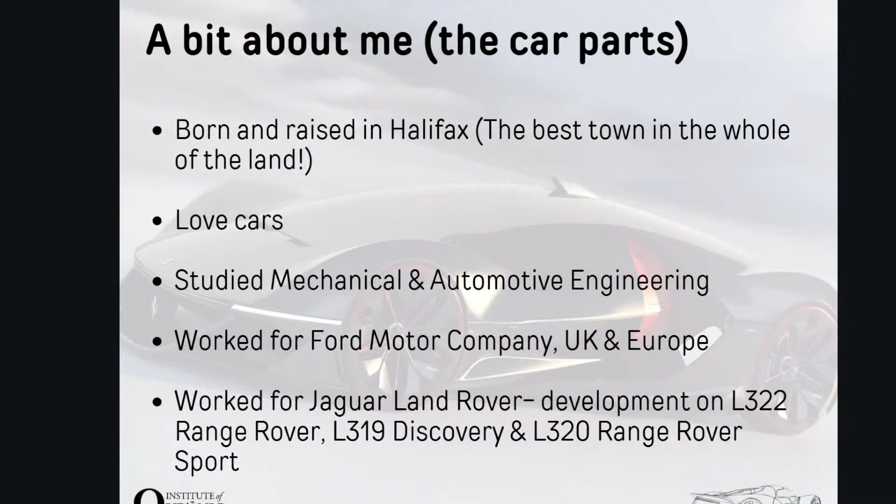So what is a car? Well, the English word car originated from the Latin word carrus, which means a wheeled vehicle. That's one of the first cars. So basically it's just 4 wheels being pulled along. What do you think that was pulled along by? Yeah, but obviously it's on wheels, but it's got no engine because it's before engines. What do you think it's pulled along by? Horse, yeah, well done, horse.

And that eventually goes to something like this. So these are obviously more modern supercars, hypercars of nowadays. Anyone name any of them? There you go, well done, good man. So how long do you think it took to get from the first one to these?

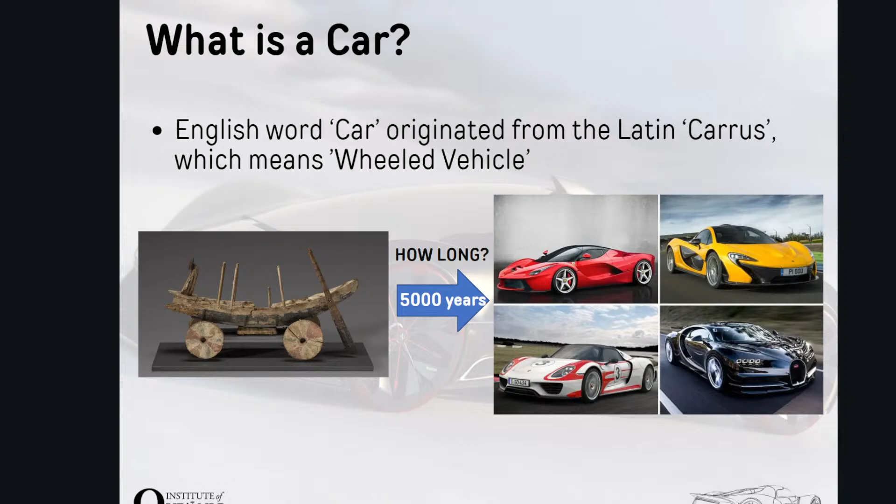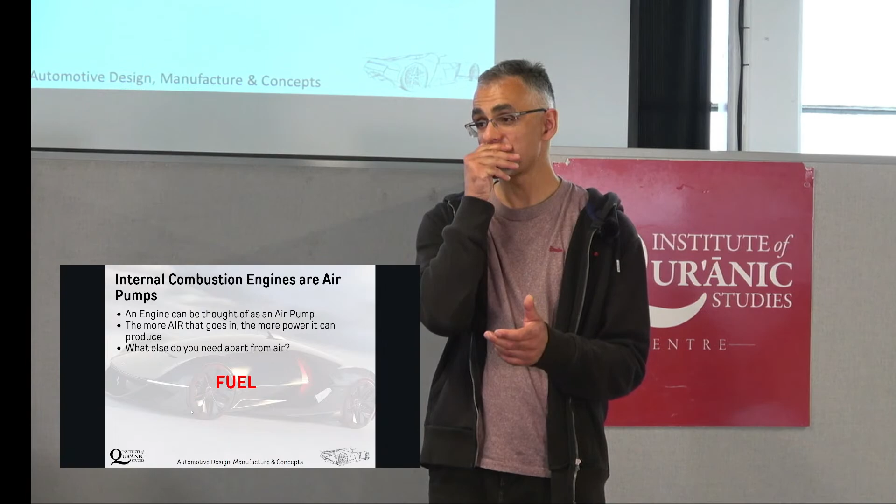So what else do you need apart from air in an engine? Fuel, yeah. What type of fuel? Diesel, petrol. What else? Well, that's sort of more for an electric motor car. Obviously, this is for an engine. So you could use biodiesel, bioethanol. In Brazil, they actually use fuel made out of sugarcane.

What's that, sorry? Batteries, yeah. Well, you need a battery, but the battery is just literally to get the engine going. A key, a spark. Right, so you need fuel.

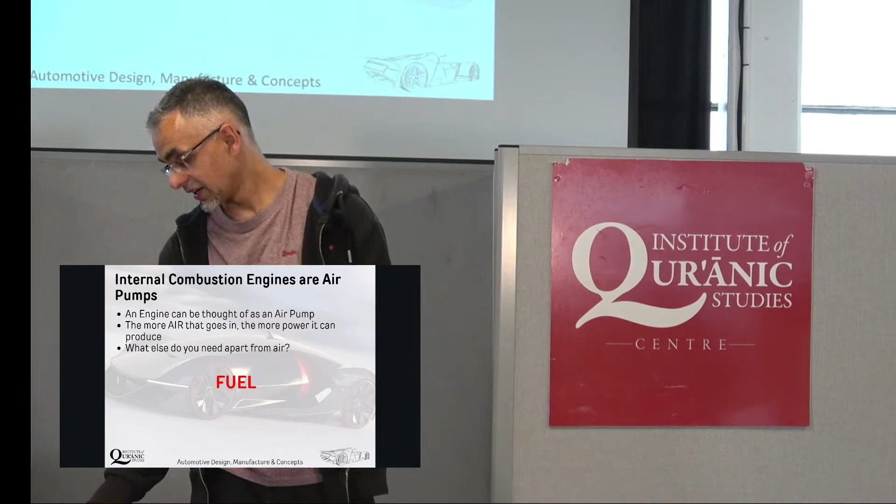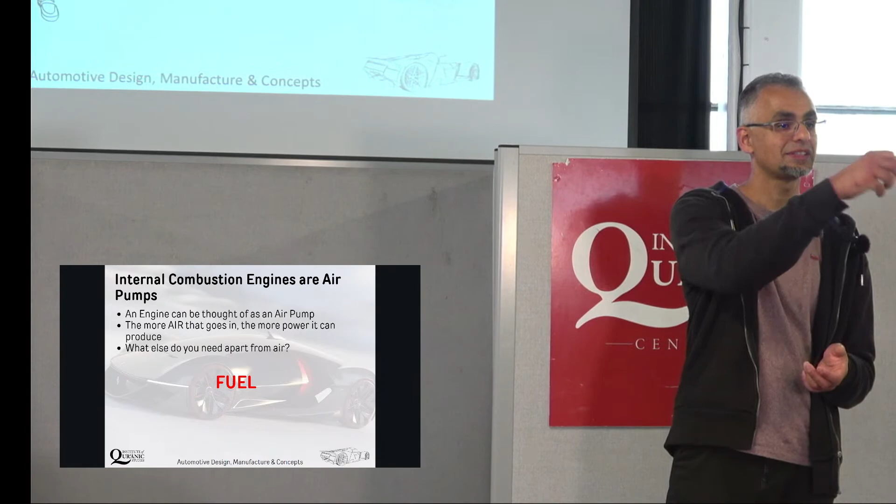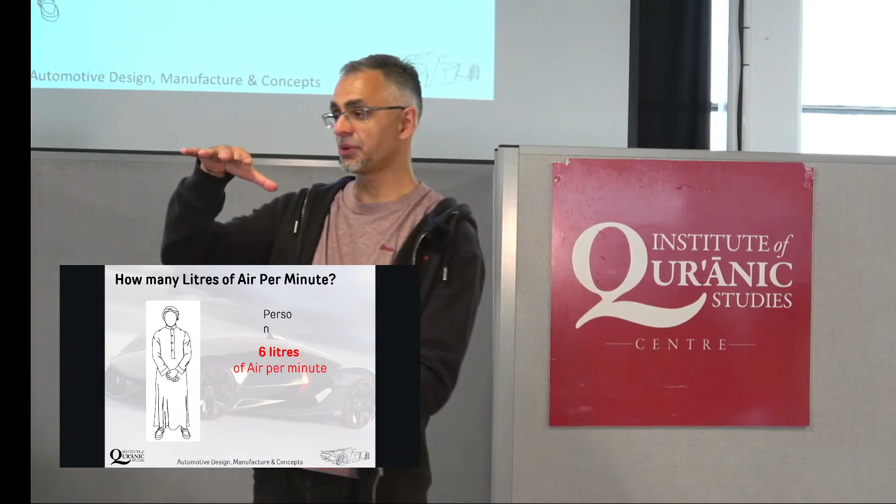Just to give you an idea, how many litres of air per minute, because obviously an engine's an air pump, don't forget, yeah? How many litres do you think a person needs a minute? 10 litres of air - so a person doing their normal thing, do you think would need about 10 litres of air a minute? 5? 120 litres - if you imagine the litre bottles of milk or whatever, you'd need 120 of them. I mean, that's quite a lot.

1,002? Yeah, otherwise you can come up here and do the course, and I'll come and listen to you. Okay, that's a bit of a more sensible answer. 6? 6, right?

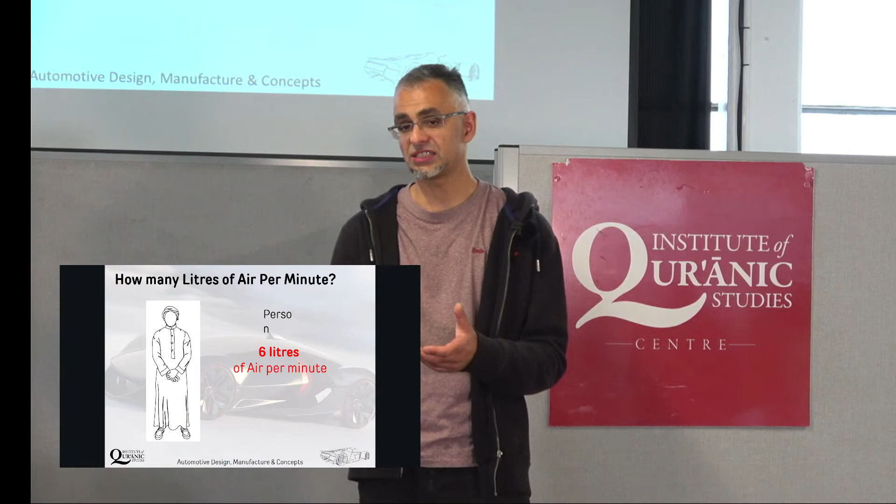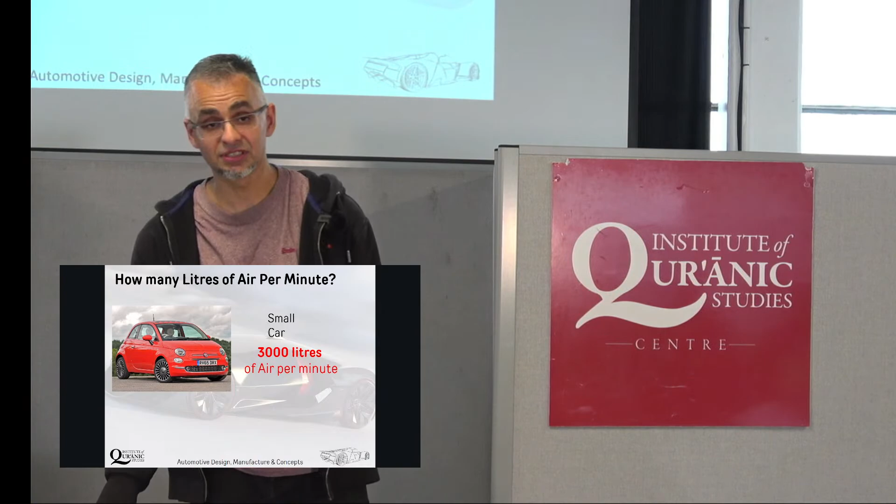A small car, how much air do you think that needs a minute? So bear in mind, a human needs 6. 500? 700? 300? 350? 260? 150? 2000? 3,000? So if you imagine a human being needing 6 litres of air a minute, going to a small engine needing 3,000 litres - now that's quite a lot.

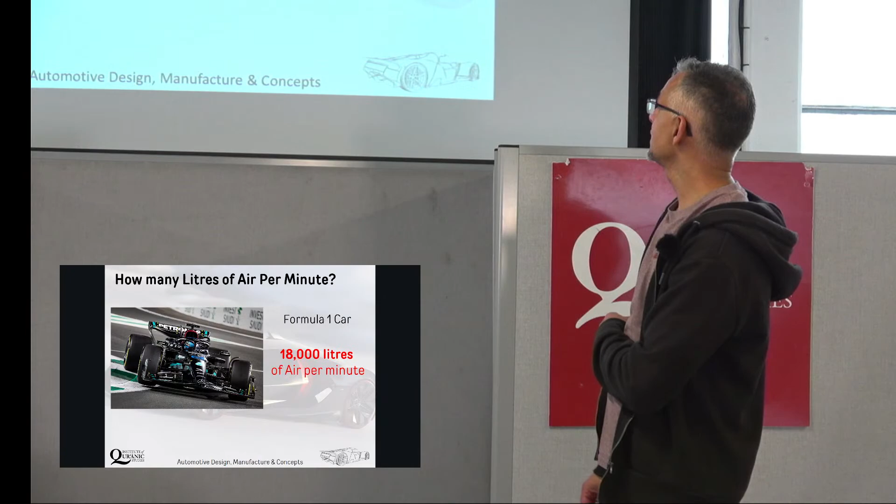Also, I told you that's 80. 18? 18, I think that's Lewis Hamilton in that car. So yeah, 18,000 litres of air a minute.

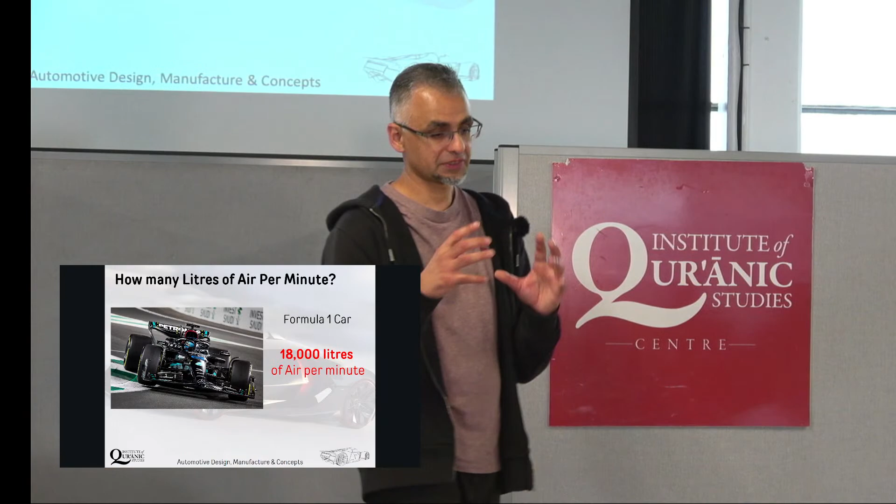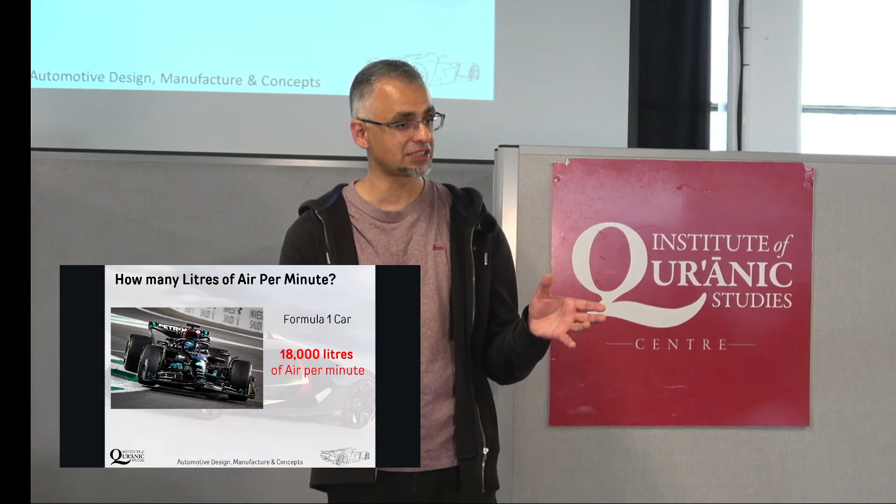And the other thing is, in any type of motor racing, they have to try and keep it as a fair playing field. So the way they actually limit the amount of air going into the engine - how do they limit the amount of air going into the engine? Because obviously if that's limited, you're going to limit the power. How do they limit it? Yeah, so the intake might be, I don't know, 35 mil or 40 mil or 50 mil, which is quite small really. So that's the only volume of air that can go through there.

So that's quite interesting really, if you imagine how much power these cars produce compared to a normal road car. Okay, so how can you get more power from an engine, do you reckon? We're talking about the air principle here. So what we want to do is try and get more air into the engine. How would you get more power? So there's 3 ways.

Yeah, a remap would do it, but I'm talking about trying to get more air into the engine. How would you get more air into an engine? If you imagine, here in Birmingham, whatever the air pressure is, normally 1 bar at sea level, that's the amount of air going in. Now what you want to do is force more air into the engine. If you can force more air into the engine, you can produce more power. Obviously, by doing that, you've got to put more fuel in as well. So how can you do that?

Increase the air tank, increase the fuel, and put nitro into it. Yeah, so you've got one of them. The nitrous is one way of getting more air in. Why is nitrous one way of getting more air in?

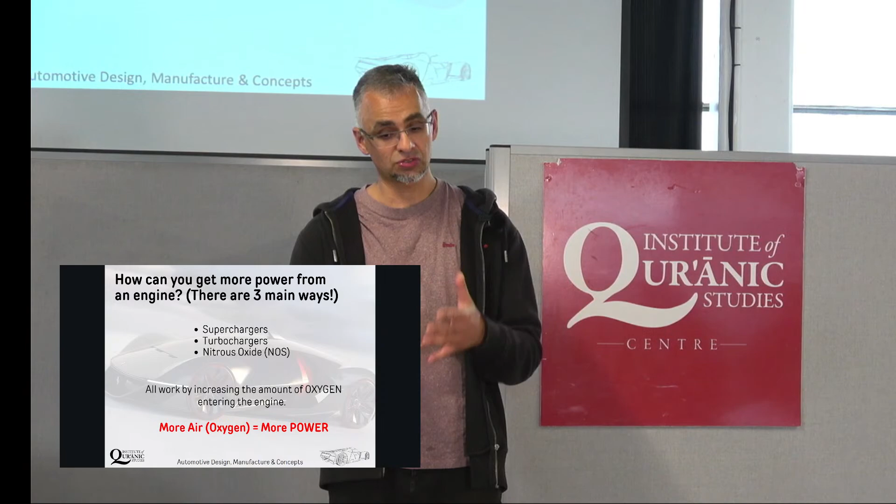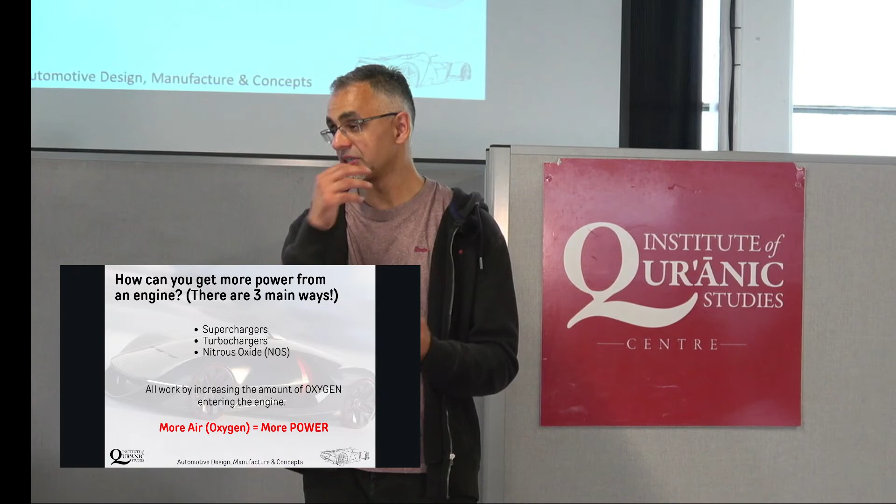That's why, if you're ever driving - one day you'll be driving your own cars - if you're in a really hilly, high altitude area, the engine's going to struggle to produce its maximum power because the amount of oxygen is lower. They say the air is thinner, but really the amount of oxygen is less. Modern cars' computers actually work that out and adjust the fueling, dropping down the power just to make sure you can carry on driving. In the old days you'd have trouble, you'd have to open the bonnet, set the carb and everything to carry on. So yeah, more oxygen equals more power.

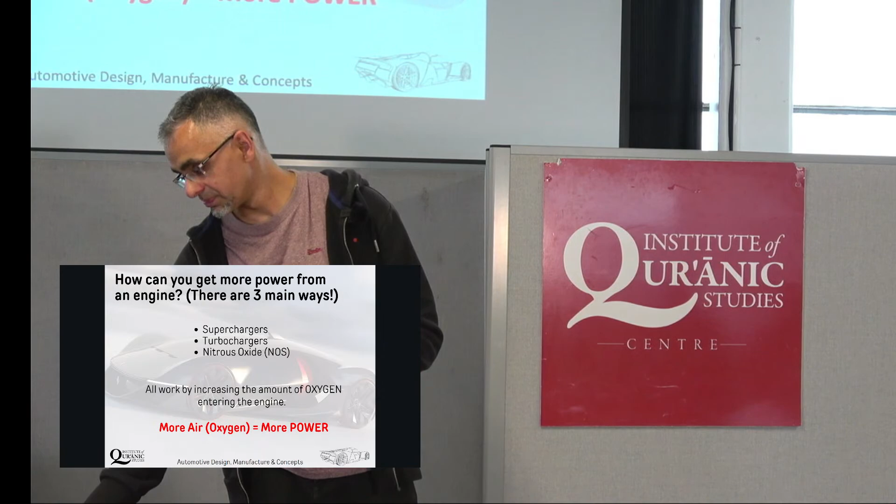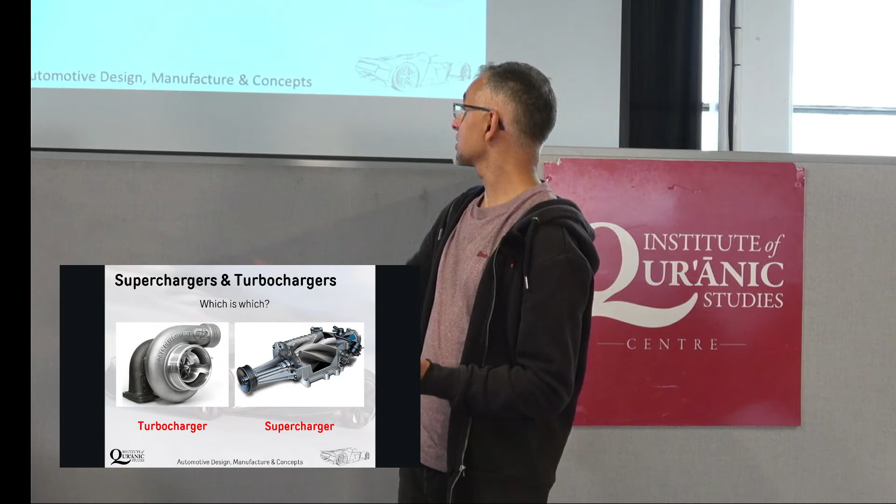Okay, so superchargers and turbochargers - there's going to be pictures of each one. Which is which? What's the one on the left? That's a turbo, yeah? So the one on the right's going to be a supercharger. A turbo, they actually call it a snail as well - that's kind of a slang word for it. If you're into cars, they call it a snail because it looks like a snail's shell. Obviously the supercharger is on the right, so it's a bit more bulky.

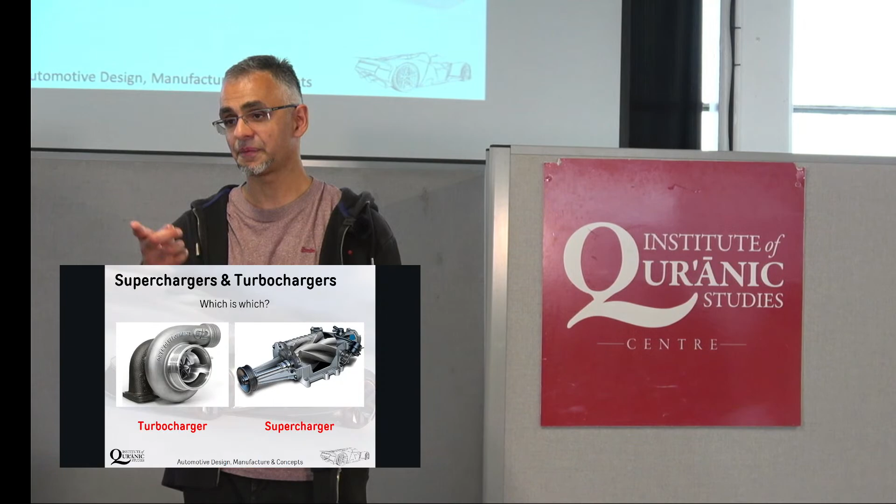Superchargers were actually developed for planes, high altitude military aeroplanes, because turbochargers could actually stall. Does anybody know how a turbocharger works? Yeah, but how does it spool up the air? Because what it's doing is spinning the air, compressing it, so you get more air forced into the engine. What actually turns it to spin it? Exhaust gases. Whereas a supercharger runs off the engine itself.

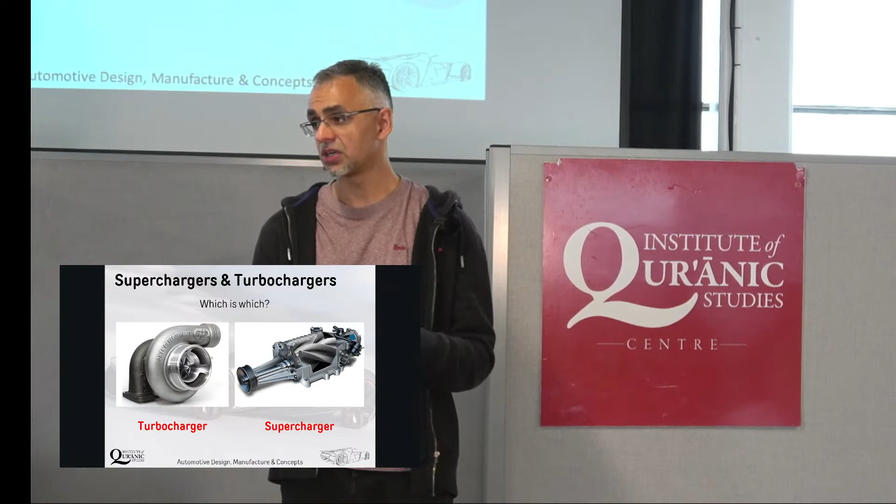So if you've ever been in a turbocharged car, or driven one, when you put your foot down you feel nothing, nothing, nothing, and then all of a sudden the turbo kicks in and you're off. With a supercharger it's a bit different - you get more power from the off. A lot of the Mercedes are supercharged, so if you have a look on the back, some say compressor, that's a German word for supercharger. I think they're probably the only ones that do superchargers generally. Most cars are turbo, because a turbocharger is a bit cheaper to make, so that's the reason they're fitted to most cars.

Okay, next thing is concept cars versus final design. So you know when they design a car, you talk about cars and see some cars which look beautiful, and then you see some cars and think, why would they have made something like this? Nobody would ever buy this. All these cars have actually been a concept car, so somebody, or a group of people, have said, look, we like the look of this car, we want this car and we want to see it on the road, we want to drive this car.

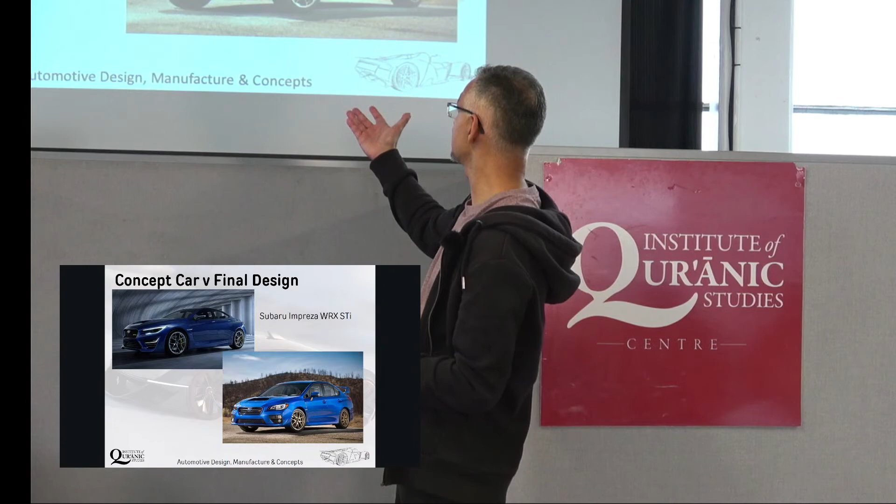Subaru? Mustang? Subaru? Ford? Okay, that's actually a concept of the Subaru Impreza, and that's what the final car looked like. So you can kind of see the similarities. Yeah? See the similarities? Slight design.

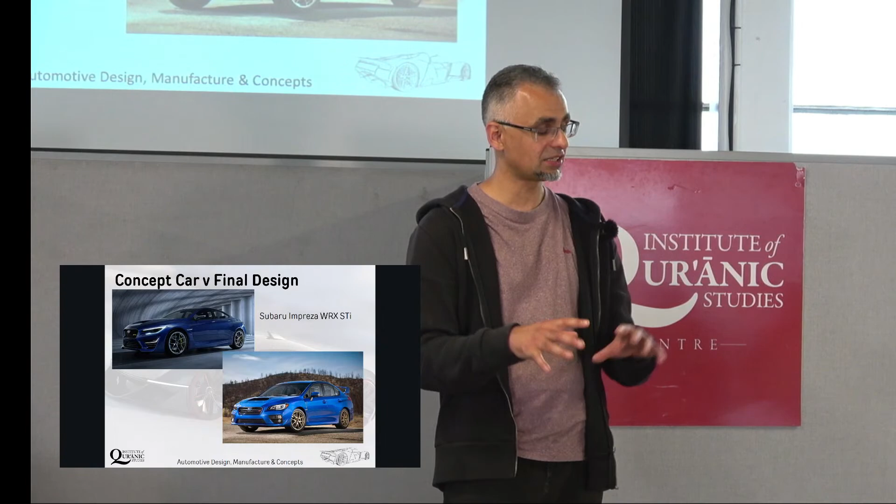Concept cars very rarely make it into production because the designers go wild and they don't care about if it's possible to make it, if it's going to be legal to make it, i.e. no sharp edges, things like that. If it's going to be comfortable, if it's going to be practical—all they're looking at is an idea, and they farm it out to potential customers to see what they should be doing.

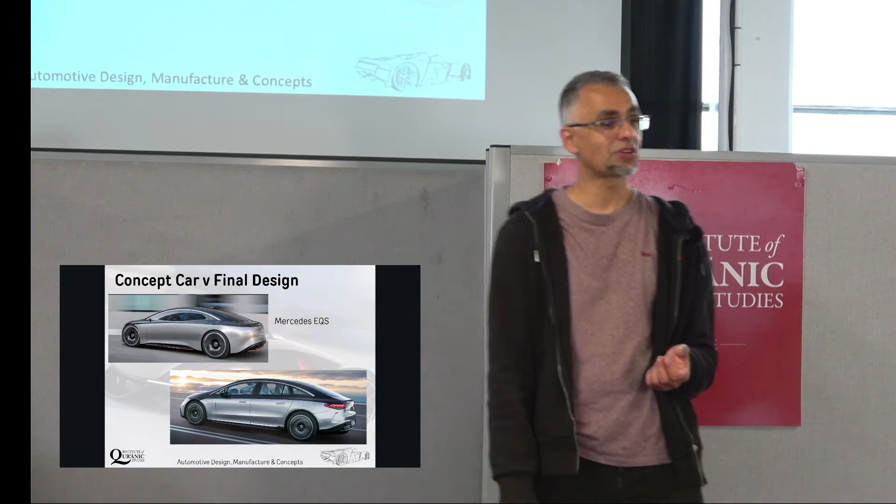Right, next one. I think this one's a bit easier. Mercedes? Mercedes, yeah? Okay, we'd all agree it's a Mercedes. So why would you say it's a Mercedes? The shape. Yeah, because of the shape? Yeah. It's got the what, sorry?

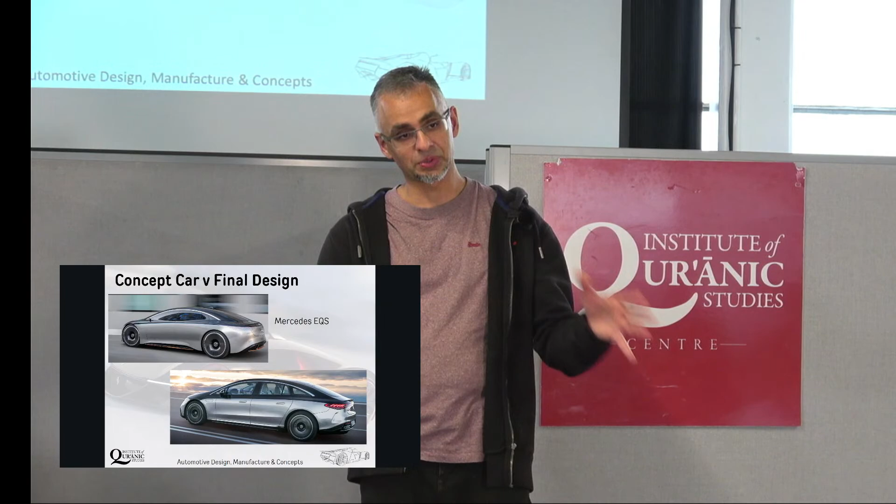So it's got the TriStar, which is part of the Mercedes logo. It hasn't got the badge on the wheel. I was waiting for you to say that. But with the Mercedes, it's sort of quite curved—you've got the roof line, normally a continuous flowing curve. So that's sort of a trademark of the Mercedes.

So that was actually the concept car for the Mercedes EQS, and that's what it turned out like. So that looks pretty similar, I think. Yeah? You guys think that looks pretty similar?

It looks what, sorry? It doesn't look nice, yeah. I mean, I'm not really a fan of the modern Mercedes, but again, it's personal preference and some people love them. If you look at the back of the concept, it's curved outwards. If you look at the back of the car now, it's curved inwards.

So that's probably a slight change—do you know why they might have had to do that? Anyone hazard a guess? No? I think more than likely... Safety is normally at the front, so you know you have crumple zones on a car to protect passengers, pedestrians and everything else. That might have been a consideration, possibly. I don't think so, because they could probably mount the number plate.

No, I think it's probably down to aerodynamics, because as the car's going through, it's got to be aerodynamically efficient—if the car's aerodynamic, it's going to use less fuel and it's going to be quicker as well. Yeah, exactly, so go faster. So you see these cars with little spoilers and little scoops, and all that's been designed in something called a wind tunnel. So what they do is they take a model of the car, put it into the wind tunnel, blow air through it, and then with computer analysis, they analyse where the air is flowing, and by that they make slight changes to try and improve the aerodynamic flow.

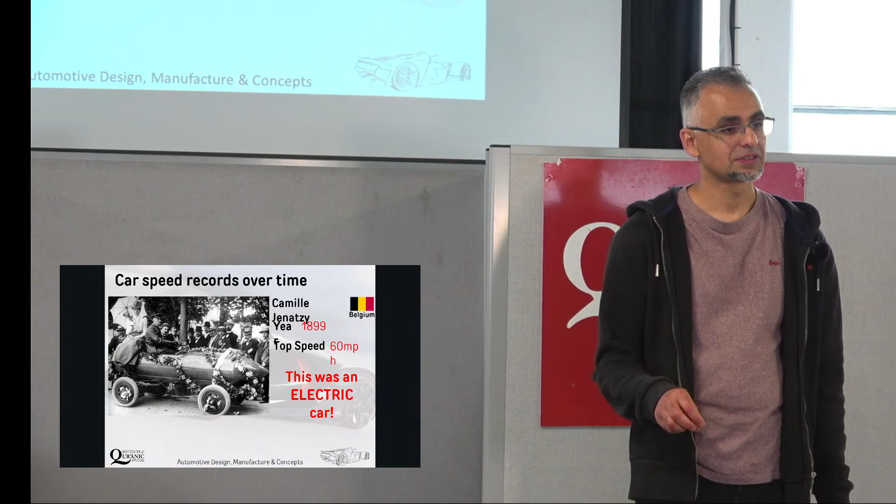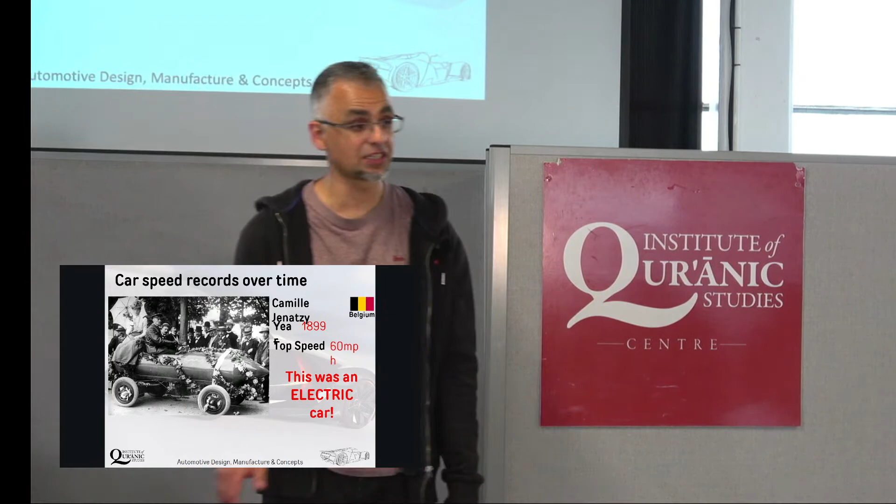What year do you reckon this was? 1980. Okay, right, so we've got lots of opinions on this. 1899. Yeah, so around about 125 years ago.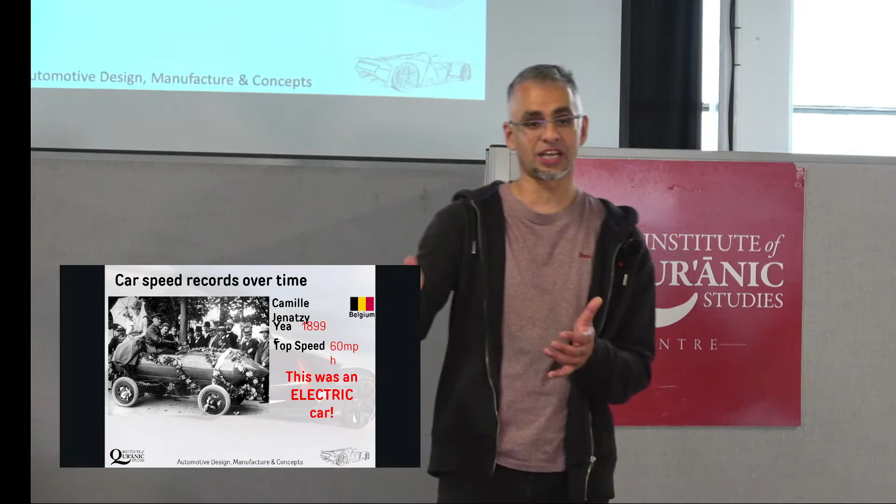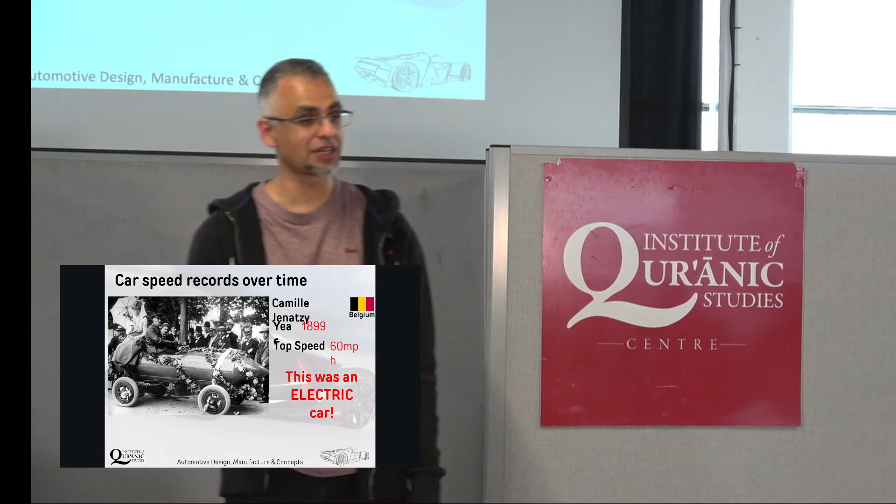So what do you reckon his top speed was? What do you reckon he got a world record at? Bear in mind, we're at 300 miles an hour now. 10? 40? 85? 60? Oh, but if you imagine, we've only come another 240 miles an hour in 125 years, so I think personally he did pretty well there.

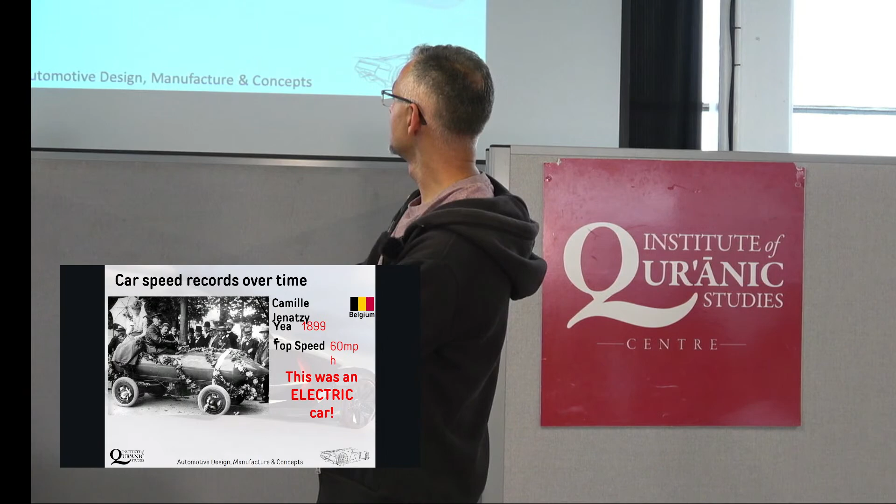Anyone know what's special about this car? Like a bullet, yeah. I mean, it actually looks like he's driving it on his wedding day. I don't know if that's his wife on the back or whatever, with all the flowers. Taxi? No, it was electric. It was electric, yeah. Can you believe that? It was electric then. Well, lead acid batteries there would have been, and there would have been a lot of them. So most of that would have been storage.

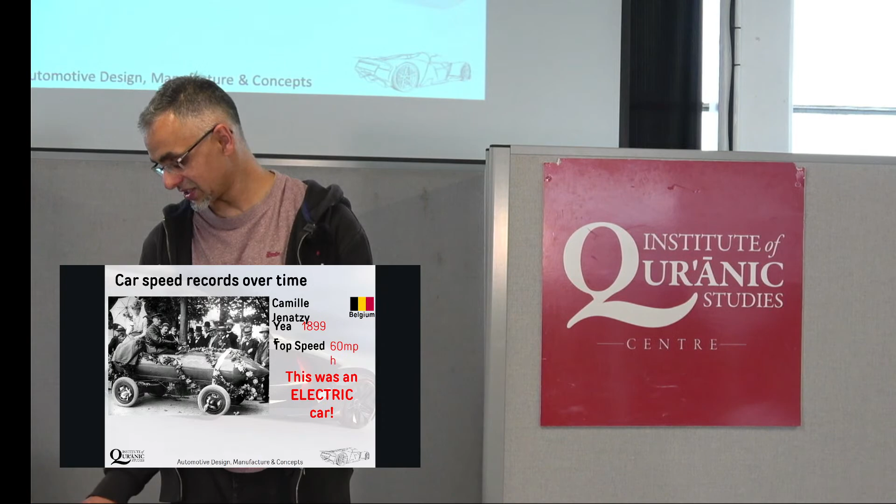Right, so let's go to the quickest car. Anyone know what holds the record for the quickest car? Non-production. Yeah, Thrust SSC. And so what type of power plant does that use? Do you know what type of power plant it uses? Solar? Hybrid? Wait, that's what it looks like.

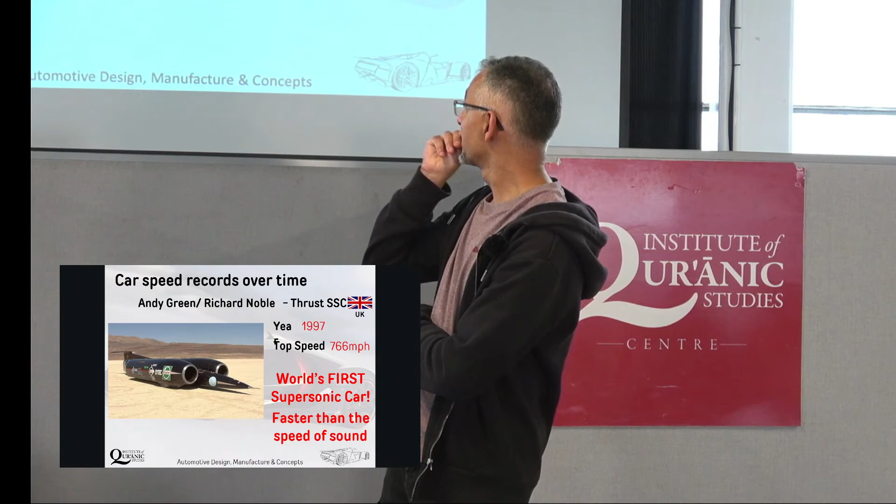Right, I mean, it doesn't look like a normal car, does it? Yeah? Right, doesn't look like a normal car. Yeah, it does look like an airplane, doesn't it? So you know the two round things on the side? Right, two round things on the side, what are those? Rockets? Jet engines, well done. So it's got two jet engines.

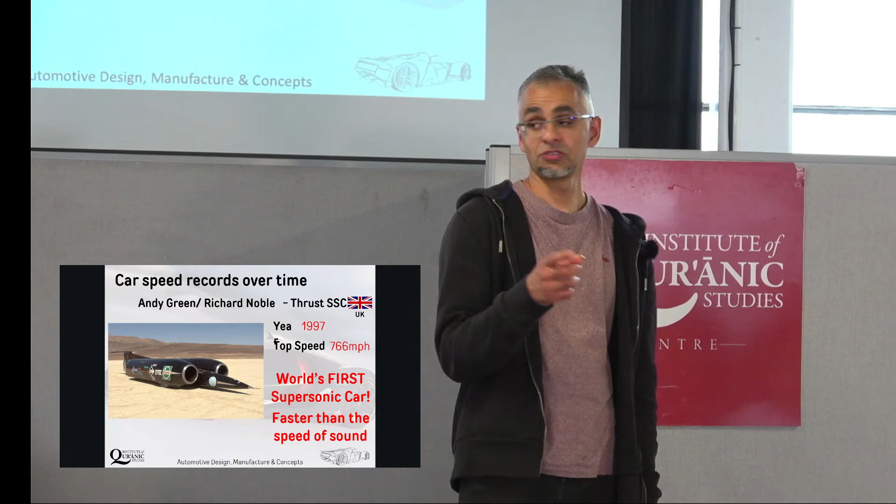So it was actually designed and then driven by a guy called Andy Green, along with a guy called Richard Noble. They're British, from the UK. What year do you reckon this was? 2011. No, one at a time. 2018? 2012? 2004? 2002. Okay, so we're all in the 2000s. 97? And that car still actually holds the record.

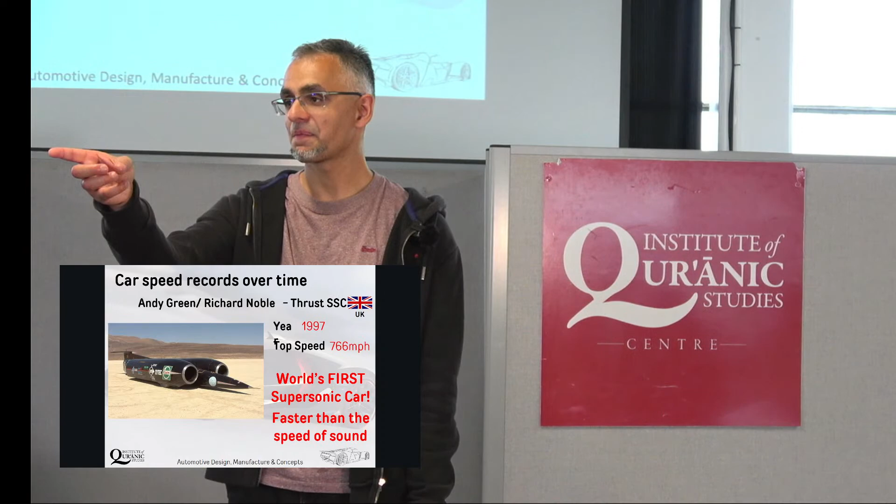Right, what do you reckon the top speed was? 6,000. No, I'm not going to ask you. 678,000. What, miles an hour? 678,000 miles an hour? No, they wouldn't even survive 7,000. It's about 600. 8,000. 455. Right, right, it was. Whoa. 766 miles an hour. Right.

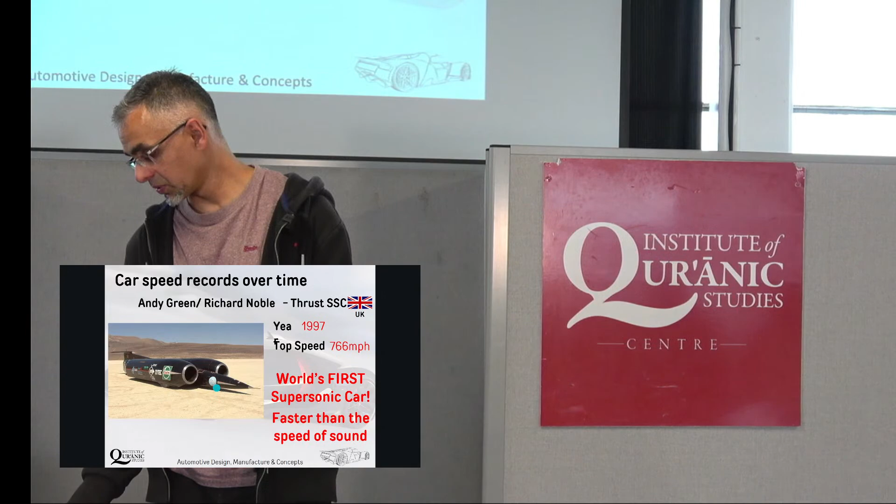Do you know what's special about 766 miles an hour? What's that quicker than? So it was supersonic. So what does supersonic mean? Oh, faster than sound. Faster than the speed of sound. So what is it? So it was actually faster than the speed of sound.

So do you guys know what a sonic boom is? Yeah, when you actually go through the sound barrier. Yeah, you're going past the sound barrier, and basically the sound waves - the easiest way to imagine it is a boat going through the water, and it's going through, you've got the wake, which is the water going past it. Now the object is going so quick that it's actually going through that, so it actually goes past it before you actually hear it. Normally, if you're at school and somebody's playing football, somebody kicks a ball and they're a bit way down the field, normally you see it before you hear the sound. So you see it and then you hear the sound, yeah? This is obviously the other way around.

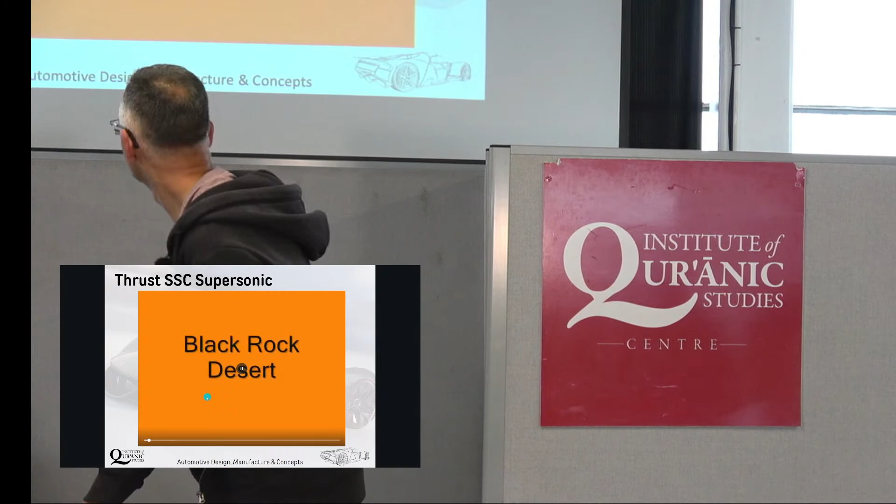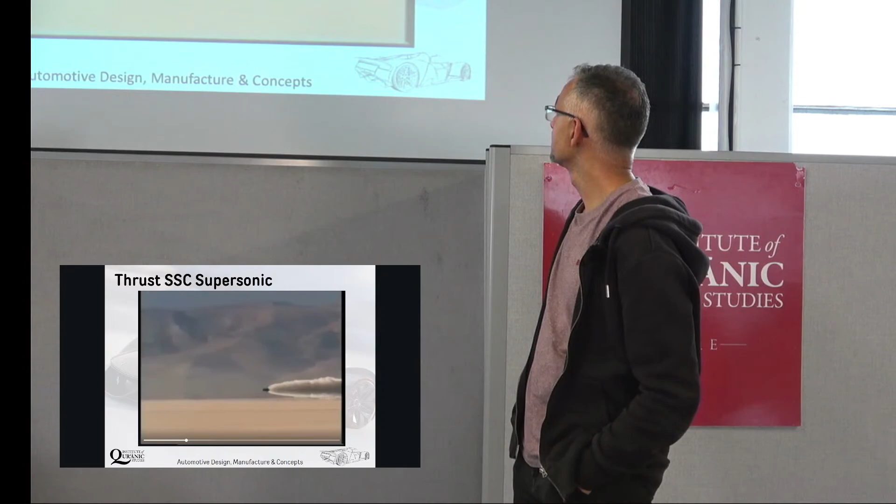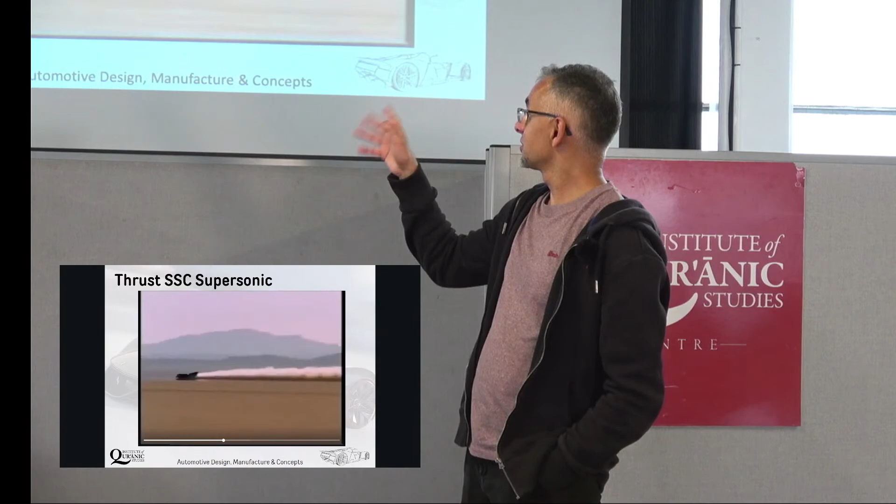We've got a video here. I don't know if it's going to play or if the sound's going to play. Hold on. So this was the high-speed run. Can you hear that? I think that's a bit low. Right, for our viewers online, so there was sound there when it's actually broken the speed of sound. So it's gone through that.

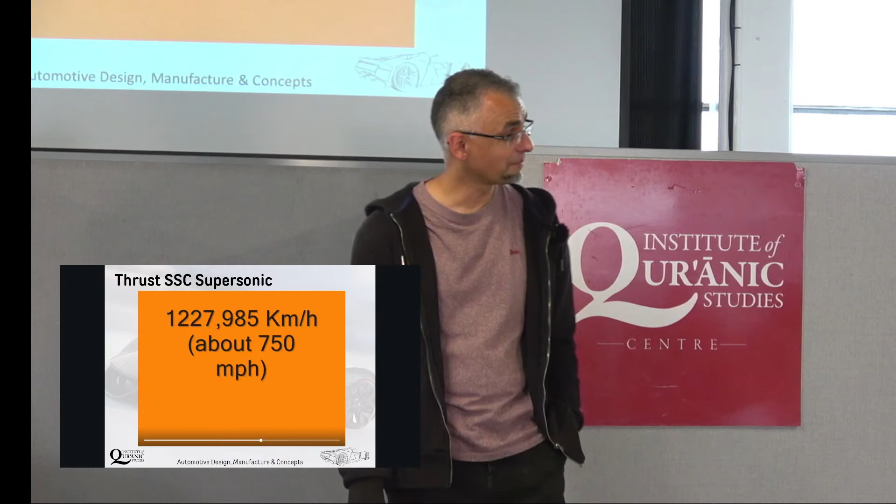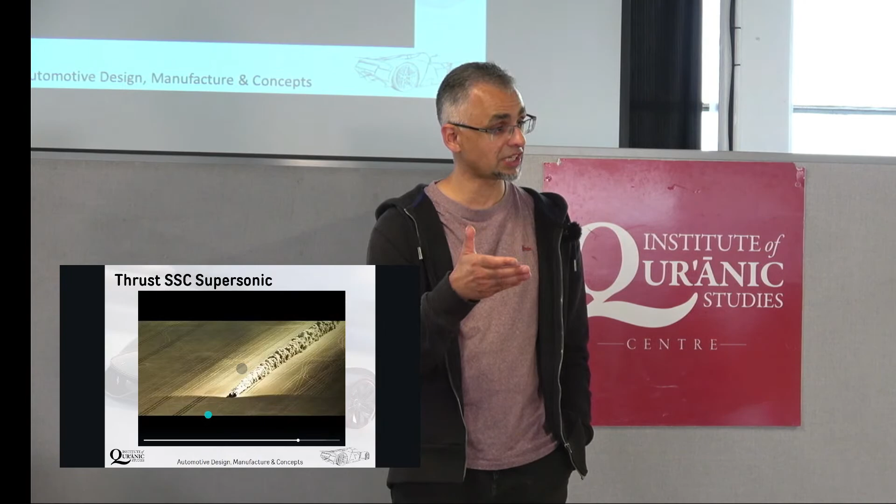It looks like it's going to... Yeah, well it is dangerous, and lots of people have actually lost their lives in the pursuit of speed. So obviously these guys are quite lucky, but there's been lots of cases where even in air, on water, on land, people have lost their lives because you're pushing the boundaries.

You're pushing the boundaries. If someone's driving like that... Right, hold on, look, somebody's asking a question. Maybe we can all learn from this.

If someone's driving that fast in that car, do they just float over water? They could do, or what else do you reckon could happen? I mean, you're going at that speed, what do you reckon could happen? If they crash, they could fly out. They definitely would fly out. I don't think the seatbelt would help them.

So if they were to crash into a wall that's like one brick thick, they're just going to go straight through it, and it's probably going to explode. Yeah, but the reason why they do this...

If you go back to there, let me see. So if you have a look, they actually do these high-speed runs in the desert, basically on old salt lakes which have dried out many, many years ago, and they're pretty much flat. So they have to do it in a great big open area, because otherwise you're not going to have the space.

And you're right, you can't do this on a normal road, you can't do it on a normal test track. So most of these cars, they take them over to the salt plains in America, and that's where they do the high-speed runs.